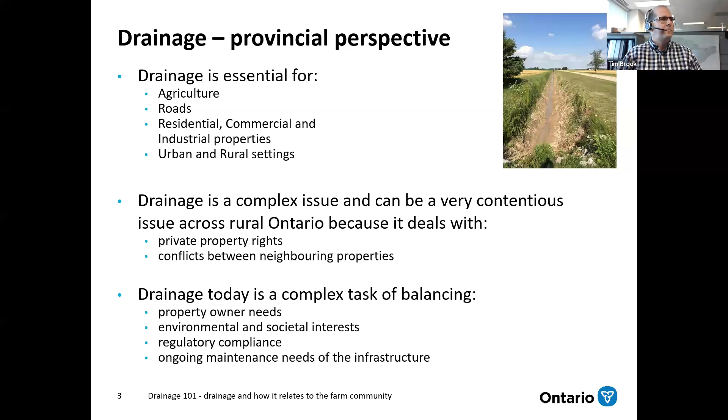A whole bunch of factors affect drainage, including how big your watershed is, your soil type, whether there's water coming from upstream properties, and really getting into how you design these systems to actually provide value and deliver the services that are necessary.

Drainage really is a combination of systems, both private ownership drainage systems as well as communal drainage systems, which we'll talk more about under the Drainage Act. Ultimately, natural water courses provide outlet for all of these systems, eventually into the Great Lakes Basin for most of southwestern Ontario. It's important to note that we talk about private drainage systems.

We're going to get into more details around what those look like, specifically roadside ditches and things like that. But some private drainage systems are owned and operated by the municipality. So when I say private, I generally mean things not covered under the Drainage Act as a communal system, because municipalities, including roadside ditches and some urban stormwater systems regulated under the Ontario Water Resources Act,

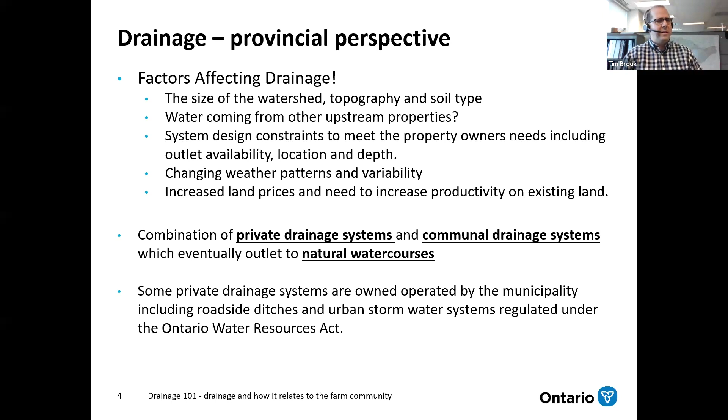are still private drainage systems meant to provide drainage for specifically a piece of infrastructure they serve. So as I mentioned, when I talk about private drainage systems, we're going to talk about a number of things, but what I want to predominantly talk about are the private agricultural drainage systems installed across fields in Ontario to improve crop productivity.

These are important to get on the fields early. They're important to create optimized crops, uniform harvest. There's a lot of valuable services these systems provide. And they obviously require what we call legal and sufficient outlet. I'm going to talk more about that as we get into things.

These legal and sufficient outlets can include natural water courses, drains under the Drainage Act, and in some cases roadside ditches. So it's really important to consider where your water goes before you actually collect it and build your system. You want to know where it starts on your field, how to collect it, and how to get it safely and legally off of your field downstream.

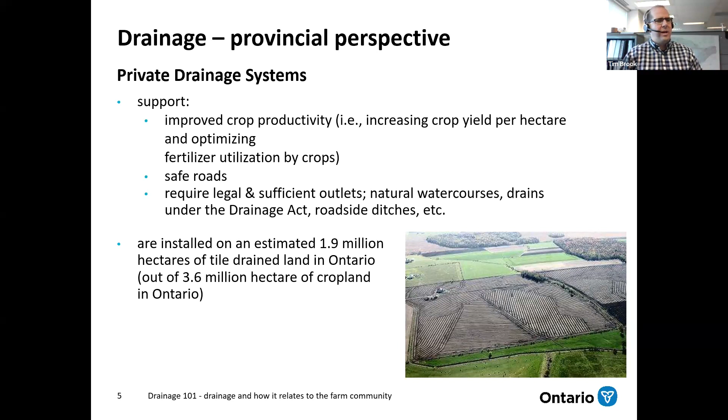A bit of context here: there are approximately 1.9 million hectares of tile drained land in Ontario, out of approximately 3.6 million hectares of cropland in total. So around 50% of all cropland has tile drainage systems installed for crop production.

Give a little bit of perspective here on natural water courses. These exist across the province and are used for a variety of purposes, including outlet for agricultural drainage, and they are captured under common law. I'm going to talk a little more about common law coming up in my presentation. These natural water courses exist unless they're modified by pieces of legislation such as the Drainage Act, and we'll talk about what that looks like as well.

On the bottom, you can see two different quick captures from our AgMap system. On the left, you can see there are very few drains, the drains being those in yellow. There's a couple there, the Mackenzie Municipal Drain as an example, but there are blue water courses on that mapping system, which are the natural water courses we've just talked about, the yellow being drains under the Drainage Act.

In contrast, you'll see other parts of the province where pretty much every single water run is a drain under the Drainage Act. These are really important to understand because there are some legal differences between natural water courses and drains under the Drainage Act. It's important to understand those differences to understand how they affect the outlets you can access for your farm drainage systems.

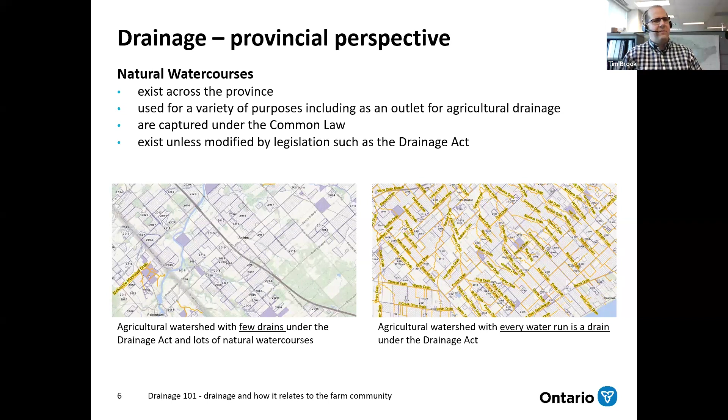In terms of drains under the Drainage Act, for some context, there are about 50,000 kilometers of drains constructed under the Act across the province. The use, density, and types of systems really vary across the province.

I just grabbed Chatham-Kent, Bruce and Grey counties, and Ottawa as a quick example. You can see Chatham-Kent accounts for approximately 8% of the total length of drains in the province. As I mentioned, that picture on the last slide where every single water run was a drain was from Chatham-Kent, so they're very extensively drained with drains under the Act.

Whereas if you go to Bruce and Grey, you can see Bruce County has a fair bit, particularly in the south, not so much on the escarpment in the north. Grey County, right next door, does not have as many drains. So it really varies across the province, and where you're located will really determine what you can use as an outlet for your private ag systems.

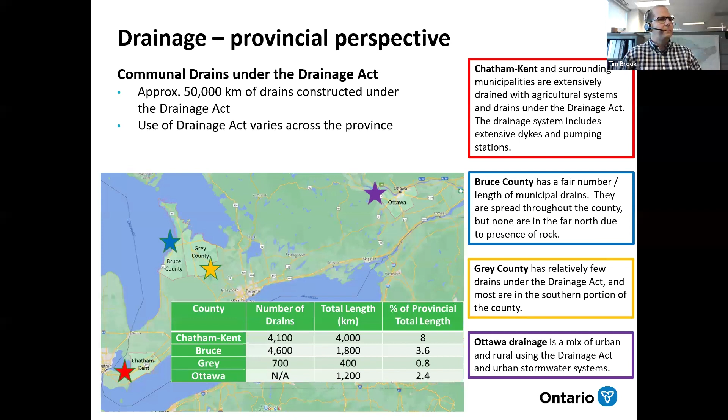In terms of stakeholders on the province-wide scale, we have a number we partner with. Obviously you, as landowners and farmers, are very important stakeholders as the users of drainage. But we also have other stakeholders such as drainage engineering firms, drainage superintendents, and tile drainage contractors. It's important to understand these are all individual entities working in the drainage realm to provide services, whether installing private ag systems on farmland, maintaining drainage systems under the Drainage Act, or designing them as superintendents and engineers do. We all have different roles to play.

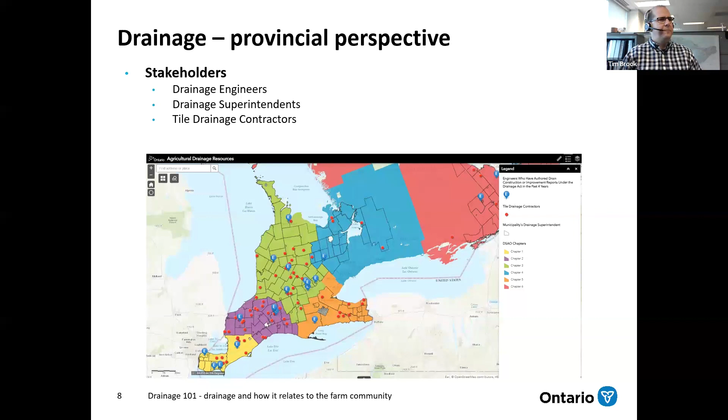So a quick little overview of OMAFRA's legislation and how it applies across the field. Generally speaking, I'm going to start in the right corner and we'll get into a little more detail on this.

The Agricultural Tile Drainage Installation Act covers the regulation of the installation of agricultural drainage systems on agricultural land. It's a process in which OMAFRA regulates these businesses, the machines, and the individual operators that provide those services to farmers. A farmer can choose to install their own drains on their own land and be exempt from the act, but contractors are required to follow this licensing legislation. We issue licenses for those three different processes.

As far as stakeholders go, there are a number of contractors that work across the province, spread throughout southwestern Ontario and also in the north. They're represented by the Land Improvement Contractors of Ontario, an association that helps support the industry with best management practices and making sure services are available in the best possible manner for the farmers' systems.

If we move up into the right corner, you'll see the Tile Drainage Act, and this is really a program about tile loans. I won't spend a ton of detail here, but this is about a financing mechanism available to farmers to get a loan through the local municipality to help fund the installation of private agricultural drainage systems.

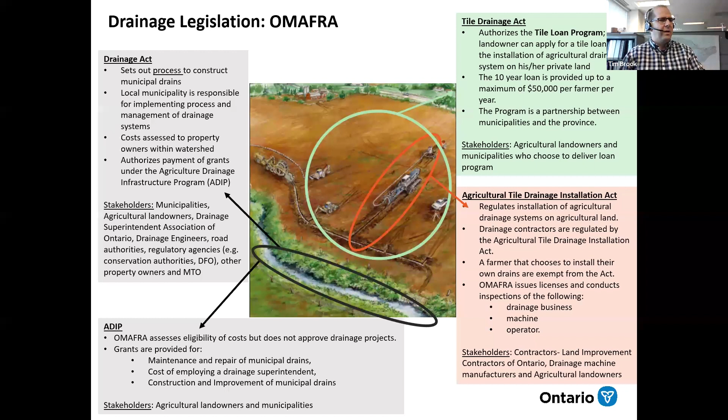Going back on the private drainage side, the Agricultural Tile Drainage Installation Act. First, what is agricultural drainage? It consists of lateral drains installed across a field to collect water and manage the water table so that excess water can be efficiently moved from the root zone and allow for proper root and crop production. It also affects field trafficability in the spring, yields, and uniform harvest. There are a number of benefits and values that these systems provide.

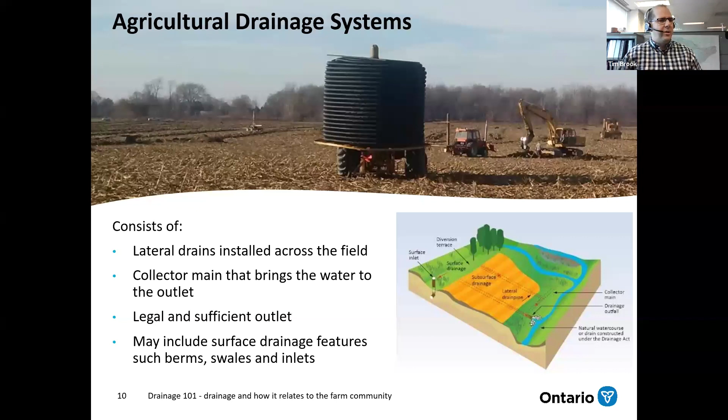Once that water is collected, it's important to make sure you have a legal and sufficient outlet for that.

As I mentioned, farmers can install systems on their own properties. However, OMAFRA certainly recommends considering hiring a licensed contractor to design and install those systems. These are contractors certified through our licensing process, with training OMAFRA provides through Ridgetown College as a licensing requirement, and they also spend a number of hours on the machine supervised by an appropriate Class A operator. That's generally our recommendation, but farmers can install on their own properties as well.

The Drainage Guide for Ontario, publication 29, is a particular resource to highlight here. This is the best management practice for drainage, and it's also referenced in the legislation, so individual contractors need to be aware of and follow the guide when designing and installing systems on agricultural land. That's a very important resource. Even if you're doing it on your own property, we highly recommend being familiar with that material so you can do the best job for your own system.

The legal and sufficient outlet is absolutely critical, and it's critical before you install the laterals, before you start collecting that water. It's important to understand where that water can go legally and whether it will get there and go downstream without causing damage to other properties. There are a number of outlets available: natural watercourses, drains under the act, roadside ditches. Illegal outlet situations, like outletting at the property line, are not recommended, but unfortunately sometimes properties are outletted that way, which causes conflict between neighbors.

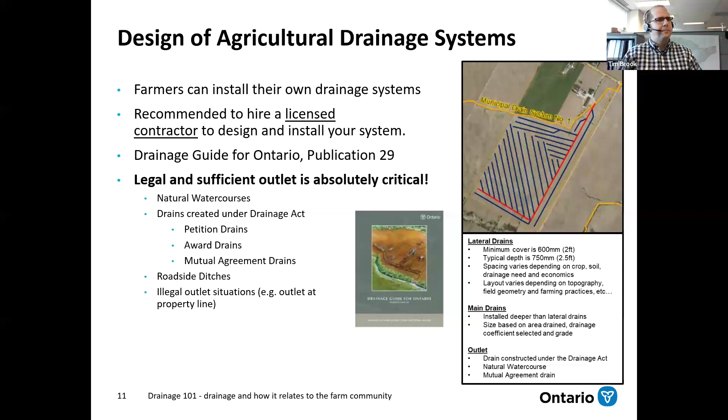So a little more detail on the act itself, not as relevant to this crowd, but it does set out that legal framework, as I mentioned, to license the contractors. We issue licenses to contractor businesses, machines, and individual operators with training requirements. My colleague Andy Kester, as our drainage inspector, goes out and does various inspections.

One thing I'd suggest for this audience when hiring a contractor is to make sure they are a licensed contractor. Ask when you get them out on site, are they licensed? Can you see a copy of their business license? Does it have the validity in terms of the dates? Are they currently licensed with OMAFRA? That's really important because you want to make sure you're hiring a licensed contractor to do the work. That means they're up to date and current with everything they need to do.

As well, if you are going to potentially access a tile loan, the tile loan program requires that the work, if done by a contractor, the contractor must be licensed at the time of installation. So it's very important to ensure that your contractor is currently licensed at the time of doing the work.

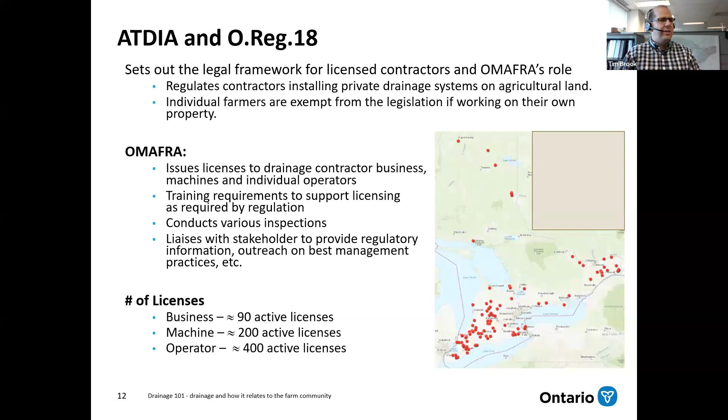As far as contractors, there are about 90 active businesses doing this work across the province, and they employ about 400 operators who do the work with about 200 machines. It's a fairly extensive industry doing a lot of work across the province on a day-to-day basis.

So as I mentioned, the Tile Drainage Act is basically a piece of legislation that authorizes the tile loan program, and this provides owners of agricultural land with access to loans for the installation of their systems. It's done through the local municipality, so OMAFRA partners with the local municipalities, and this has been going on since about 1878 when the Tile Drainage Act was put in place.

The general process for you as a property owner or farmer is to go to your local municipality, determine if they offer the program, and if they do, apply through the municipality for your loan. They have the paperwork in place and provide support in terms of what is required and how to do that. Once approved, the work can be completed on the farm to install the system, and the municipality provides the inspection and certification of the work, noting who has completed it.

It's important to note that individual farmers can do the work on their own property and apply for a tile loan. Again, the exemption has to apply that it's on your own property, the same as the act itself. The municipality then sells a debenture directly to the province, who funds the process through the municipality to the applicant. The municipality then passes a bylaw to allow that money to flow to the property owner, as well as authorizing the annual repayments that are collected and submitted back to OMAFRA to repay the loan.

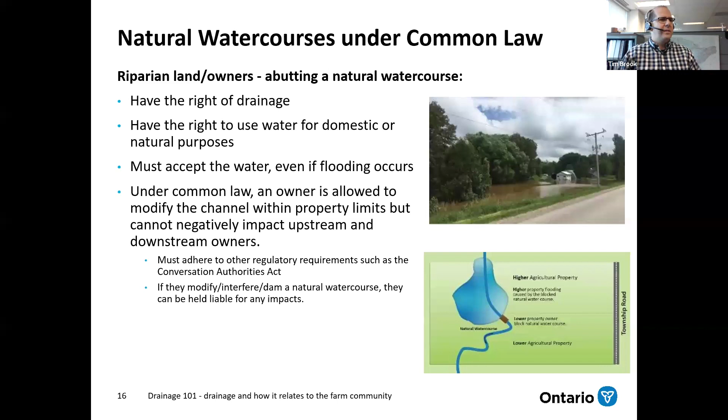It really has no inherent right of drainage. So it's certainly going to collect in the low areas. It may even flow across your property boundary to your neighbor, but it doesn't have the right of drainage under the law. So the lower owner does not have to accept this water. They can berm their property, they can protect it and not accept your water, which of course creates a problem now that you don't have an outlet for your farm property because it doesn't drain through a natural watercourse and the neighbor can berm that particular water.

A few things to consider here with collected or uncollected water are the liability issues. If I'm not collecting this water and the flow of the water is going across my neighbor's property, the likelihood of a lawsuit causing damage to my neighbor is pretty minimal. However, if I'm collecting it through, for example, an agricultural tile drainage system and discharging it onto my neighbor, there may be some grounds for a lawsuit. So it's that collection versus uncollection.

And then it's important to reference here a prescriptive right of drainage. As I mentioned, surface water has no right of drainage inherently. If though surface water is collected and deposited on a lower landowner, and that's been uncontested for 20 years, it's possible that a prescriptive right exists where the neighbor now has to accept that water and the water continues to flow the way it always has for that 20-plus years.

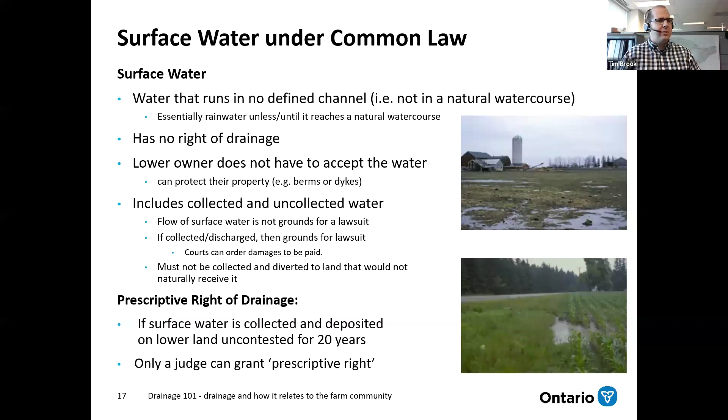But it's important to note that only a judge can actually grant that prescriptive right. So we're going to touch on that a little bit when we get into the conflict between neighbors. So as I mentioned, this is the common law piece and it always exists.

It's kind of the bedrock, if you will, across the landscape unless modified by things such as the Drainage Act. And it's important to note that there's no agency assigned under common law for resolution of these drainage issues. It's really a court-based system or a mutual agreement type of system between neighbors. And so it gets quite challenging sometimes or messy.

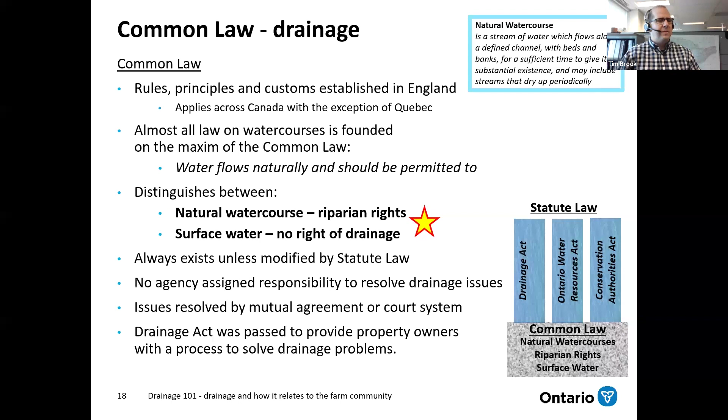And so the Drainage Act itself was passed to provide property owners with a way to resolve those drainage problems that can't be resolved by discussions between neighbors or the court systems themselves giving orders or resolution to these problems.

So a quick little overview of the Drainage Act. It is enabling legislation that allows for the solution of private drainage issues. It's watershed-based in approach, so it's comprehensive, and it's administered by the lower tier municipality.

So in essence, through a petition process, the municipality would appoint an engineer, and they would look at resolving this drainage issue. So you can construct new drains through that petition process. You can also improve existing drains if there's a change in the landscape or you need to drain deeper to allow access to your tile drainage system that you might be wanting to put in on agricultural land, etc.

And it's a system in which the professional engineer designs the system. They implement a cost sharing scheme. So through an assessment schedule, they determine how the cost should be fairly distributed amongst all of the property owners across the watershed. And it really is a process that is meant to be cooperative.

There is a lot of opportunity for property owner input. And there's also appeal mechanisms as well.

Really, at the end of the process, what happens is the drain is authorized by this process. It's protected by bylaw that adopts the engineer's report. So again, that engineer's report defines what does the drain look like, where is it, how deep is it, etc. And also the cost sharing mechanism, as I said.

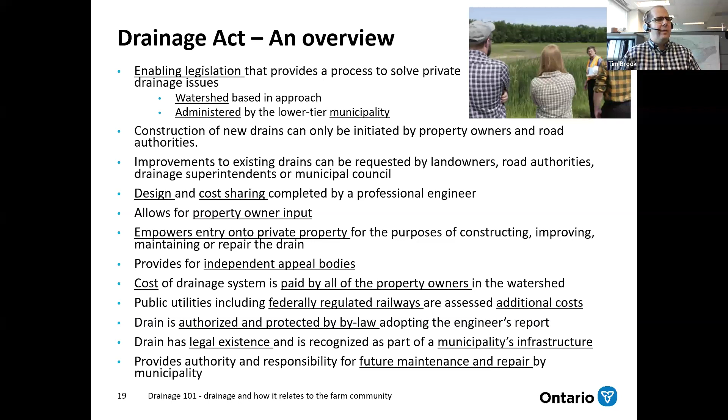So there's a number of processes under the Drainage Act where farmers can be involved. So again, petition for creation of a new drain. You may petition yourself if you need a drain, or you may be finding yourself that your neighbor petitioned for a drain and you're involved in that petition drain process.

As well, there's a number of processes for existing drains. So if you're already in the watershed of an existing drain, there might be some improvement projects that a landowner requests, or you might want to request as well. We'll touch really briefly on those.

There's some major and minor improvement processes, as well as maintenance projects for these existing drains. So if you have a drain that you're outletting to and you're feeling like the drainage is no longer adequate and there's a lot of sediment buildup, there is the ability to maintain those drains through requesting that the municipality come out, inspect the drain, and authorize a maintenance project for that. As well, there's abandonment requests and assessment schedule updates.

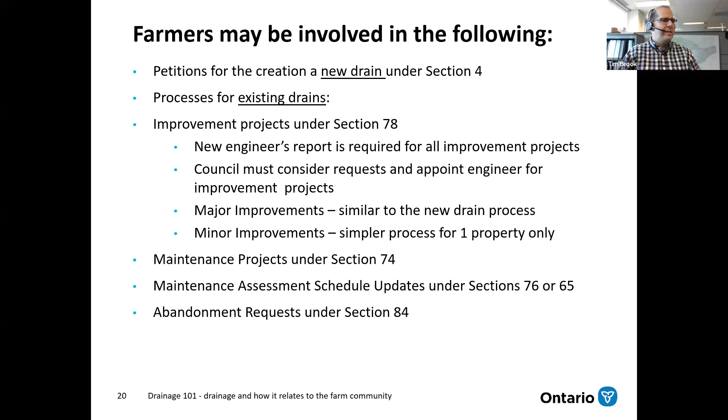So OMAFRA has some resources to assist the engineers, the superintendents, as well as the property owners understand the process, the different roles that individuals play, and in particular here, where are the input places for farmers and property owners to provide input into the project, as well as the decision points that council makes, and then ultimately where are the appeal mechanisms if things are not adequately resolved through that input process.

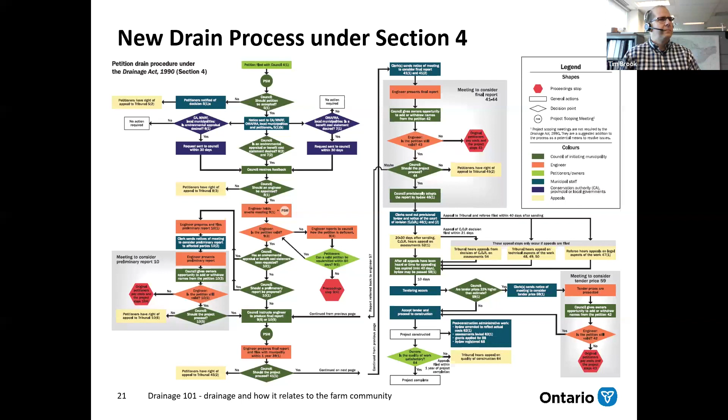As I mentioned, there are also improvement projects. There are now two types: major and minor. Major improvement projects are required to address the needs of all or a large portion of the properties in a watershed—examples include changing the course of the drain or changing capacity. This process requires the development of a new engineer's report.

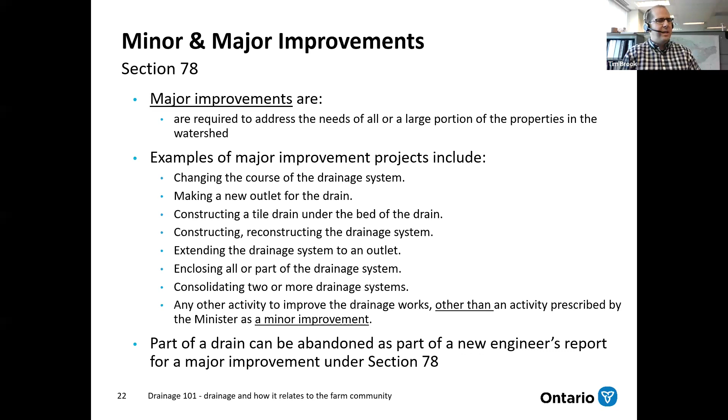This is very similar to the creation of a new drain, where there's a new engineer's report. It goes through that complicated process shown on the last slide, allowing for input, council's decisions, as well as appeals, to get a major improvement project done to an existing drain.

There's also, new as of June 30th, 2021, a minor improvement process, detailed in O.Reg. 500/21. These projects are smaller in nature and meant to address the specific need of one property owner rather than the entire drainage system. They're designed to allow projects to be completed quicker and more cost-effectively where a property owner needs a change to the drain, but it doesn't involve anybody else.

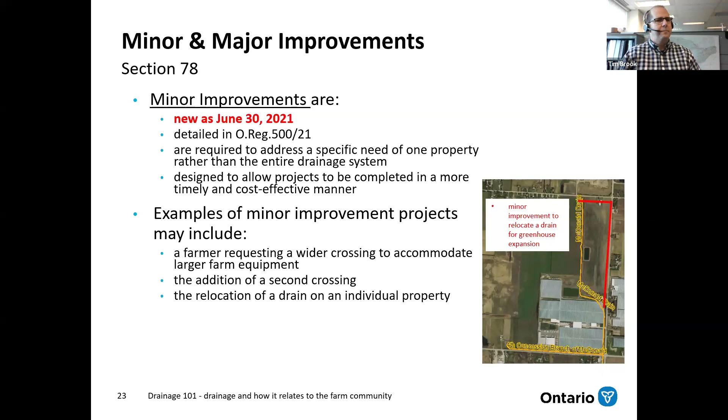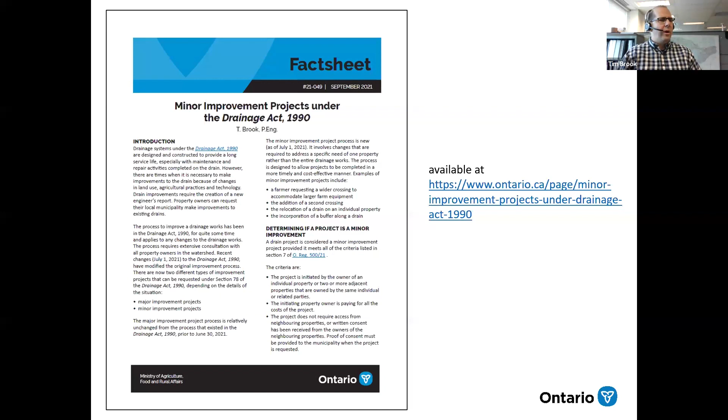We have a fact sheet available on our website that walks through what a minor improvement is. A number of these projects have been implemented since it came into effect in 2021. There's a lot of value for farmers who want to do quicker things on their property that benefit only them. The farmer requesting it is the one benefiting—it's for that property only. So the costs are paid by the farmer themselves, but it allows the process to happen a little cheaper and quicker than the full major improvement process involving the entire watershed.

Maintenance and repair is another very important piece. The Drainage Act, Section 74, authorizes and requires the municipality to maintain the drainage system on behalf of the property owners. There's a form, 0202, that can be found online to request maintenance of the drain. Farmers who need that to happen can go to their local municipality, submit the form, and there's a mandatory requirement that the municipality looks at that form and considers whether work needs to be done. If so, they need to do the work, or there's potential liability if they don't perform the maintenance work and it causes damage or crop losses from that lack of action.

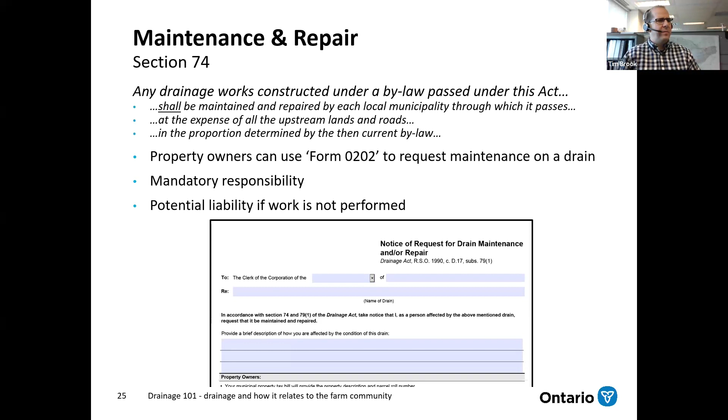There is a detailed process that the superintendent follows—they are required to follow up. In some cases there may not be, in the municipality's opinion, a need for maintenance, but generally speaking they're very diligent at going through the process.

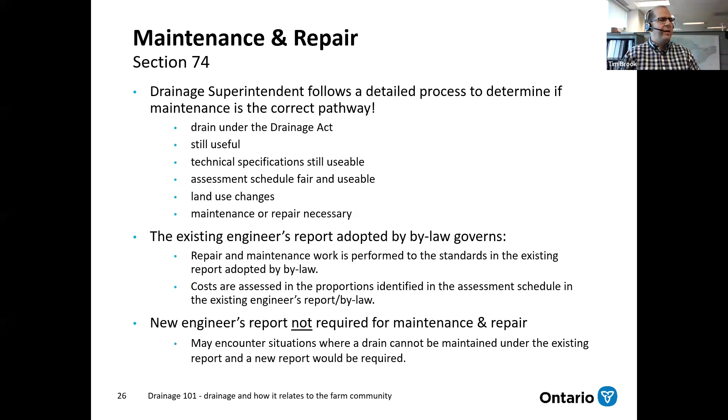It's important to understand the difference between maintenance and improvements. Maintenance and repair is really putting the drain back into its original designed and installed condition, and the existing engineer's report governs that—how deep they can dig or how far they can remove sediment. Costs need to be assessed in accordance with that report, which assesses the cost for the original construction and also has separate schedules to assess the cost of future maintenance and repair. That's what the municipality, the superintendent, is required to follow for cost-sharing of maintenance activities.

I won't get into the detail here—I'm happy to make this slide deck available through the OFA for distribution. This is the standard process superintendents follow when they get a maintenance request. They consider things such as: is it a drain, yes or no? Can I do some repair? Does the engineer's report allow me to do the work I need to do? And importantly, is the assessment schedule fair and usable—has it been set up so that if I do this work, it will be fairly assessed to the property owners getting the value from that maintenance work? That lays out how the superintendent navigates requests coming in for maintenance and repair.

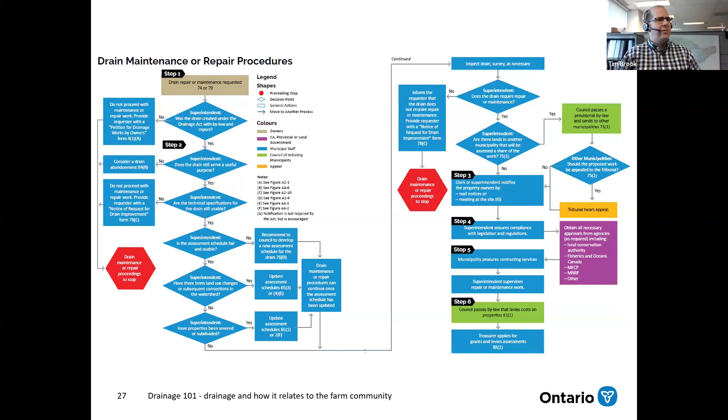Touch briefly here on the ADIP program. ADIP grants are authorized by the Drainage Act under sections 85 to 90. Generally, at OMAFRA we pay grants towards assessments made on agricultural land for drain repair and maintenance projects, for construction of new drains, and for improvement projects as well.

In Southwestern Ontario, it's a one-third grant against eligible assessment costs made against agricultural land. If you're a farmer assessed under the Drainage Act for these activities, the municipality will apply directly to OMAFRA to apply that grant to offset some of the costs of your assessment. We also provide grants to the municipality directly to help them offset the cost of employing a drainage superintendent who does maintenance and repair activities on your behalf as landowners.

A little context here: grants are applied for by the municipality. We see about 40 to 50 new drain reports coming in for grants across the province each year, about 125 improvement projects across the province each year, and really the big one is maintenance and repair of existing drains, at about 2,000 to 2,500 projects per year.

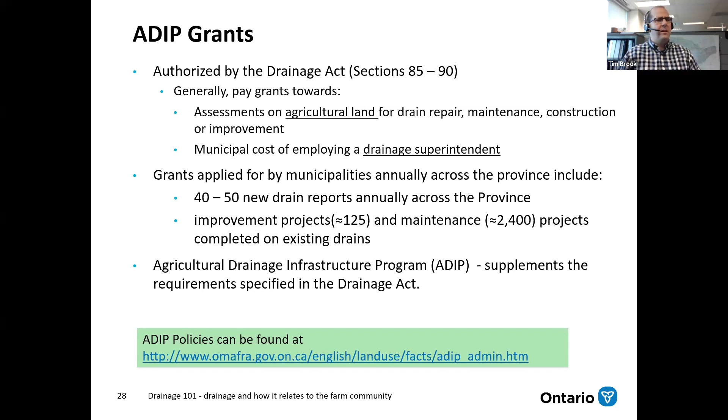We also have an agricultural drainage infrastructure program, and we have policies around that which define what is eligible for grant. Most of these things are available online, although I'm just realizing the link in this slide is outdated, so I'll update that before sending it along to OFA to find the ADIP policies.

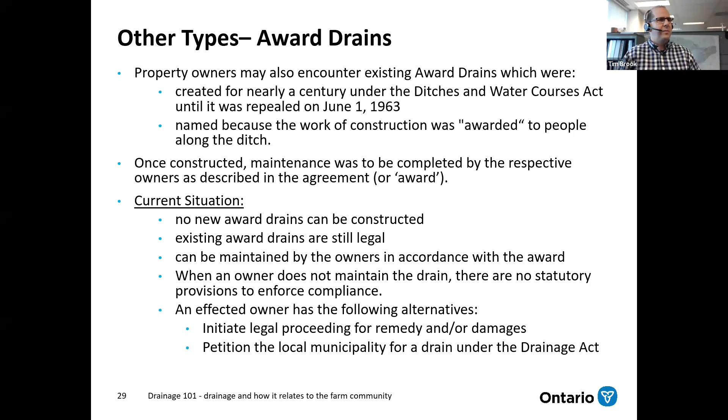Other types of drains you may come across are award drains. These were done prior to 1963 under the Ditches and Watercourses Act, and can no longer be constructed since '63, but some still exist across Ontario. If they're there, they're still legal and can be maintained by the owners in accordance with the award. These are older systems that stay until they're petitioned to be brought under the Drainage Act, which occurs often when someone does maintenance on them - they may consider bringing it under the Drainage Act by petition. Just be aware these exist and you may have a property impacted by that.

Mutual agreement drains are another way drains can be constructed. The conflict between neighbors can be avoided by not going to the courts or petitioning for a drain - you can develop a mutual agreement drain, a private drainage system that authorizes construction, financing and maintenance through a written agreement. Section 2 of the Drainage Act describes what needs to be in this agreement to make it valid.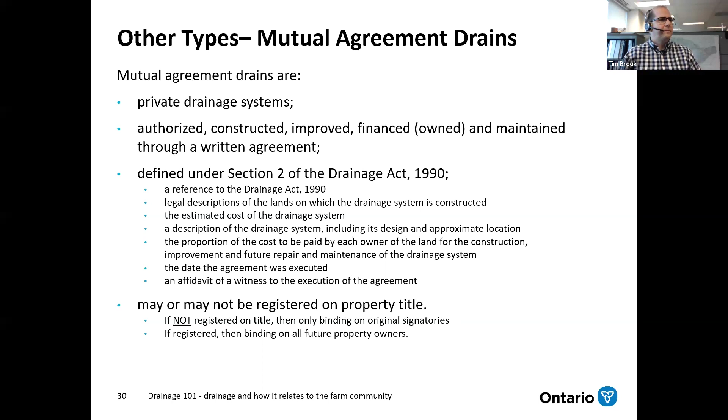The agreement itself may be registered on property title. If it's not on title, it's binding only to the original signatories, the two property owners who agreed to it. If it's registered on title, it's binding to all future property owners - it encumbers the property and guarantees the rights of drainage agreed to by the original owners in perpetuity on the property title. We have a fact sheet explaining these in more detail, including the advantages and disadvantages, so make yourself available to that if it's an option for you.

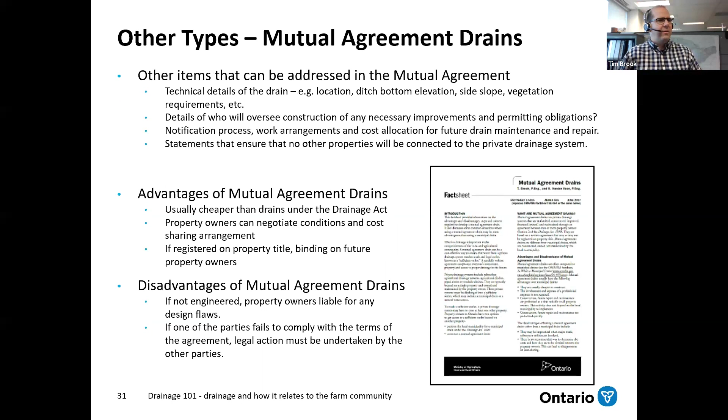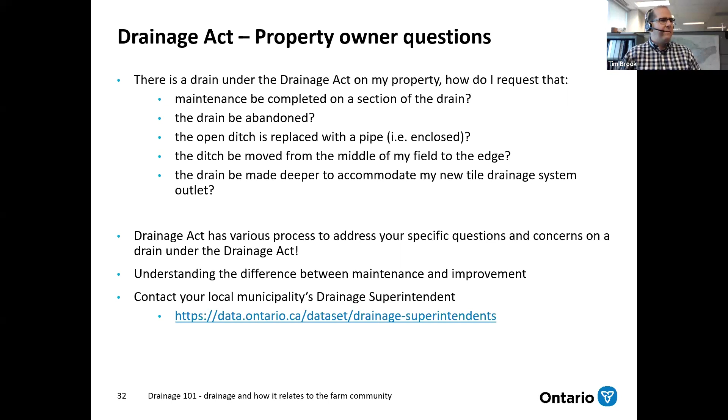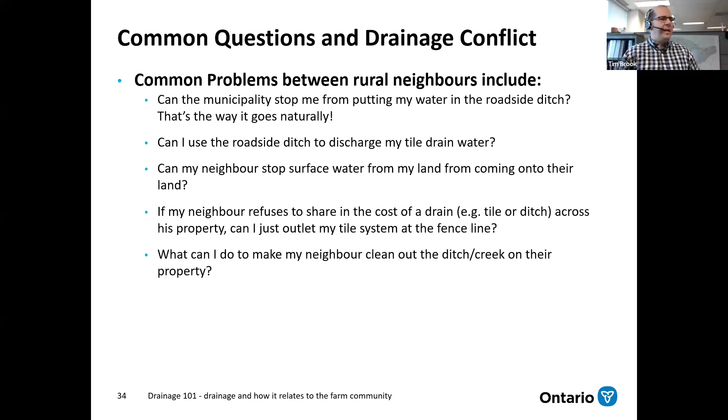Some common questions between rural neighbors that we want to try to answer in this next section: can the municipality stop me from putting water from my tile drainage system into the roadside ditch? It goes that way naturally. Can I use the roadside ditch? Can my neighbor stop surface water from my land from coming onto their land? If my neighbor refuses to share in the cost of a drain or mutual agreement drain, can I just dump the water at the fence line? What can I do to make my neighbor clean out the ditch? I'm sure there are a whole bunch of other questions, but these are just some of the more common ones that I get.

I did want to address roadside ditches specifically and then get into some other concepts here as well. So roadside ditches can either be a private drain, designed on the road right of way for the purposes of providing drainage for the road. It's owned by the road authority - could be the municipality, MTO, the county, or a number of different owners, but the infrastructure is there as private for road drainage. It could also be part of a mutual agreement drain, or it can be a drain under the Drainage Act. Really those three different legal definitions help determine: can I put my water there?

If the roadside ditch is not under the Drainage Act, there are some options. The road authority could allow you to do so - they could give consent to outlet your private system into the roadside ditch, but they don't have an obligation under common law to accept water from an upstream property owner. Even though the water flows that way normally, if you collect it and discharge it, there could be potential lawsuit issues. Some municipalities allow connections completely without conditions or approval. Others allow these connections with certain conditions and an approval step. And some don't allow connections at all. So it's important, if you want to use the roadside ditch as an outlet, to have a conversation with your municipality to understand their approach, as well as the legal framework for that particular drain that runs across the front of your farm.

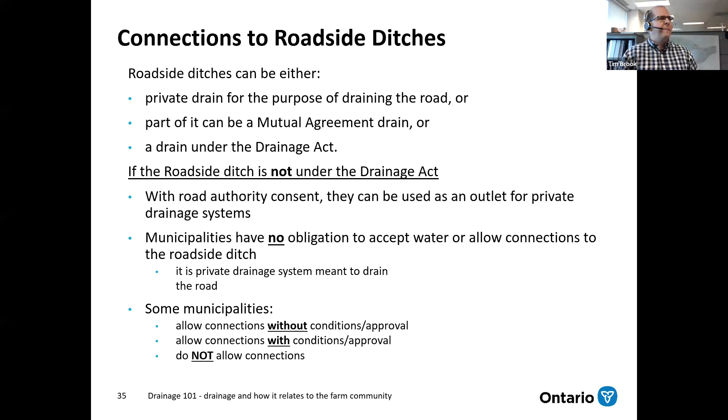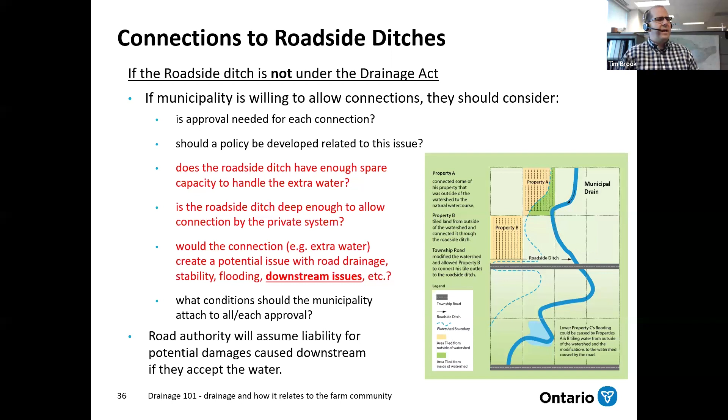If the municipality does not have a Drainage Act drain across your road, there are some things the municipality needs to consider. This is really meant more for the municipality to look at: should we have a policy on this? Does that specific roadside ditch have enough capacity? Would it cause flooding on the road? There's a number of things that need to be considered. Is the roadside ditch deep enough to allow connection to the private system? Do they have an incentive or desire to lower the inverts at the ditch bottom or culverts to allow those connections? Those are things the municipality really considers. My message to property owners is: get in touch with your municipality if you are looking at using the roadside ditch. Get that conversation up front before installing your system.

We talked a little bit about this as well - can my neighbor stop my water from flowing?

So in general, surface water under the common law that doesn't have a defined channel, not a natural water course, has no right of drainage. The lower owner does not have to accept that water. Some uncollected surface water probably isn't going to cause a lawsuit issue because it's not collected. The higher property owner likely doesn't have liability, but the lower owner could berm their own property to protect it if they didn't want to collect that water and allow it onto their property.

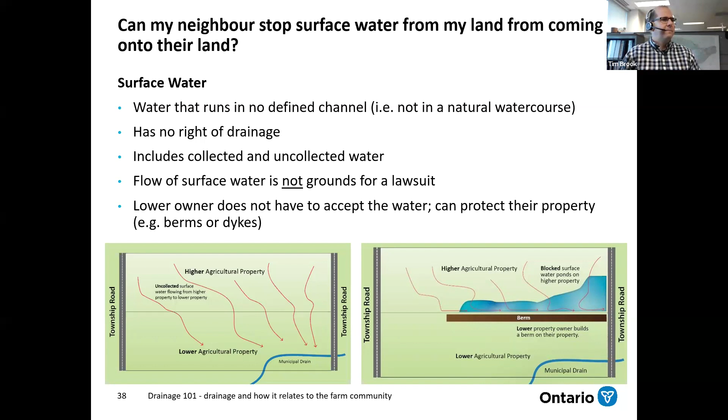That could create some conflict between neighbors, but that is within the common law itself. Can my neighbor stop water from coming onto my land? Again, if they're collecting that water, it could be grounds for a lawsuit. So before putting in an agricultural drainage system, look for an outlet from a legal perspective, and also from a sufficiency perspective.

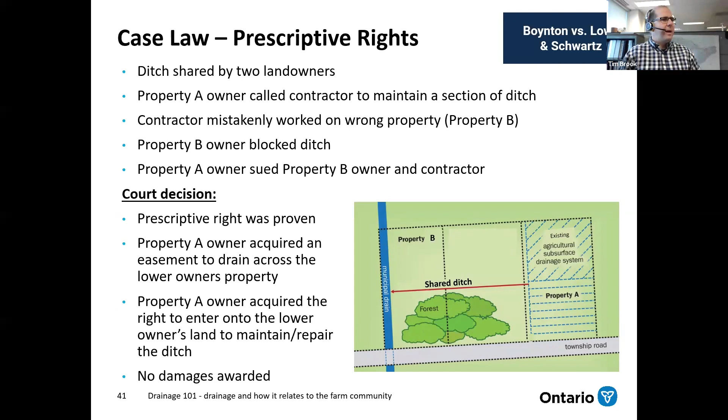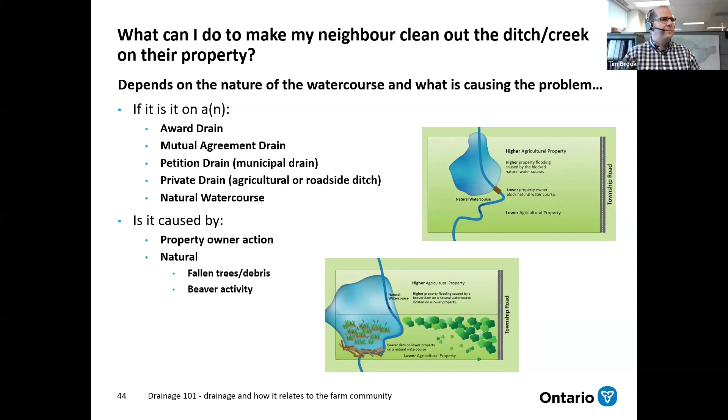If you have these scenarios, reach out to your drainage superintendent to see if they can assist you, and also reach out to our material online to see how potential solutions can be determined. I'll pass over some of that as well.